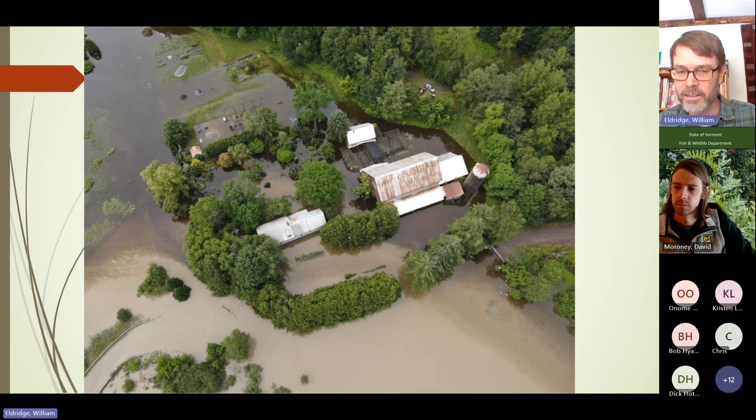So jumping into it, July 2023 made Vermonters aware of the risks that we face with climate change and particularly flooding. It was devastating throughout the state. It kind of opened our eyes to the reality that we're facing. We just had Tropical Storm Irene in 2011, and then this event in 2023. These huge events are occurring more frequently than we expected. These things could occur again in the future. And so how do we learn to live with flooding, recognizing that this is probably the future that we face?

And a couple of things. So historically, we've tried to address flooding by really just trying to get water off the landscape, out of our systems as quickly as possible, just get it downstream and try and control flooding where we can. And what we found is that really is not practical or sustainable or effective. And it can actually make problems worse. And I'll introduce some of those problems.

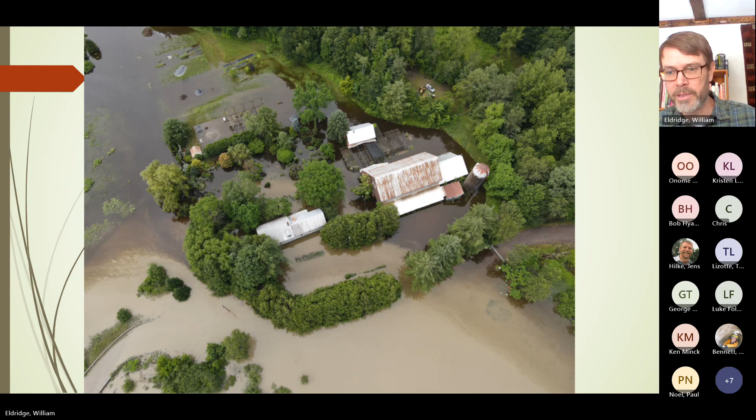But when we talk about flooding, there's really three different areas, specific impacts that flooding can have. And so this image, this is a farm that was flooded during the July floods. And so this is showing what's called inundation. So this is where that water spills out onto the floodplain and basically floods structures and dwellings and kind of leaves them uninhabitable.

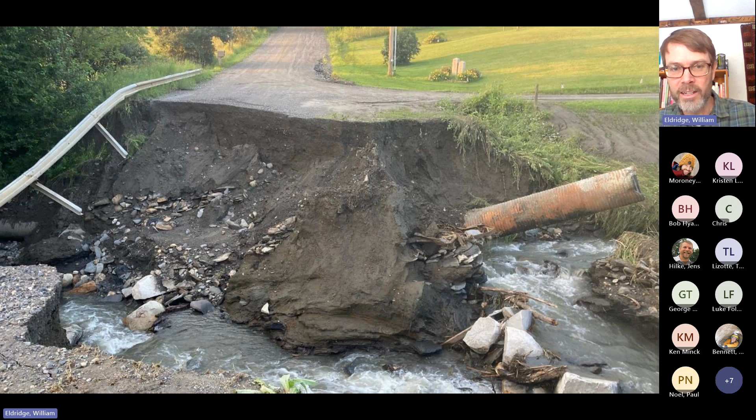And here's just another example of what can happen. Here's a road where the culvert just got washed out during last year's floods. Historically, and to some extent even today, how we respond to floods is we're just patching things back together. We're recognizing that this is an emergency situation. We need to get roads open. So we're just, in this case, slapping the old culvert back in, paving it over, and just making sure that people can get through.

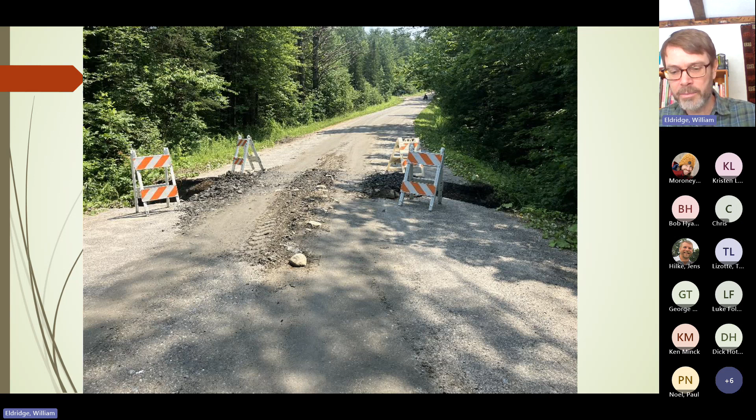Going forward, hopefully this isn't going to be the practice, but historically this is what we've done. And this is what a lot of other states continue to do: they really just put the same infrastructure back and hope for the best, basically. The other thing we've seen a lot of is people are concerned about this material getting mobilized, so they'll actually get in the stream or river with heavy machinery and dredge it out, and then build up the banks and basically create a pipe, a channel, just to keep that water in there and make it move as quickly as possible.

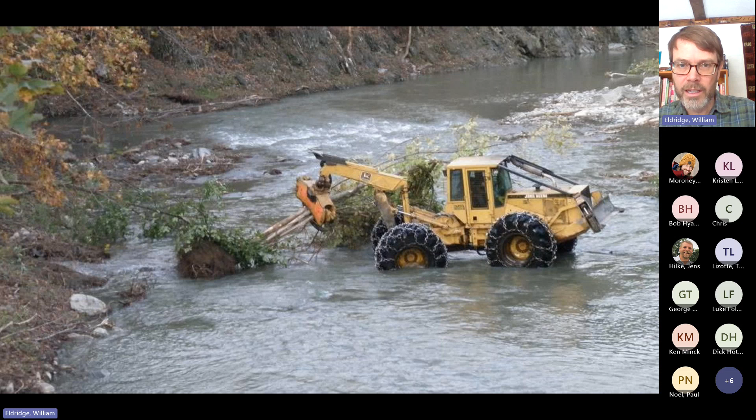Here's another example of removing trees from the river. These are pictures from after Tropical Storm Irene, where people were going in and removing material from the river. What ends up happening is you end up with situations like this where, from a fish perspective, this is not good habitat. This is a type of area where we wouldn't find fish. Also, because the banks have been built up, it's holding more water in the channel.

One of the questions I often get is, how are these floods impacting fish? There are two different outcomes that can happen. In situations where we've left the habitat intact, we will see a small decline in the fish numbers, but within 1 to 3 years they'll actually recover. And often we see increased growth in the fish. You get a lot of terrestrial subsidies, as we call it, a lot of food, bugs and stuff falling into the river. Those fish that survive are doing really well and grow really quickly. So when habitat's left intact, these populations recover pretty quickly.

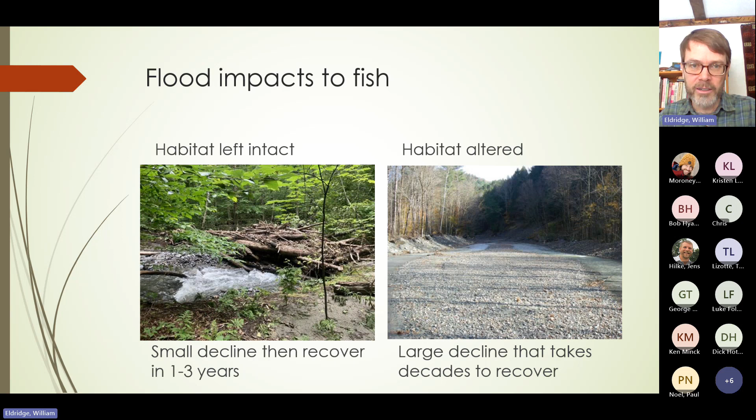In these altered habitats, where we've channelized the system, removed all the material, removed the habitat, we don't see those populations recover. We see the populations crash, and even after Irene, we haven't seen those populations recover, to the point that we've had to go back into some of these systems and try to restore that habitat. We actually just did a project, ironically, in August of last year. It was a post-Irene habitat recovery project that we did in 2023 while dealing with that flooding. So again, point being, we're still recovering from some of these habitat modifications that happened a decade ago.

The other issue is that this flood response can also be detrimental to people. We've straightened our rivers, we've removed the material, and we've basically created this perception that we've reduced the flood risk. So we've built in these flood-prone areas. This is actually my neighborhood in Montpelier, where we've straightened the channel and put houses back in what would have been the floodplain or river corridor, where the channel would have migrated historically.

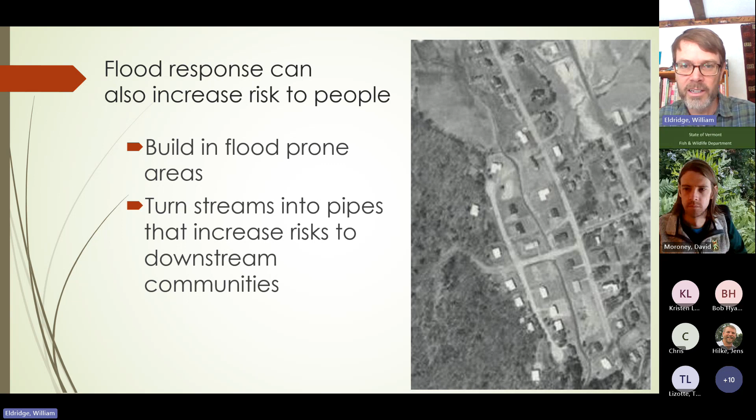The other issue is that we've turned these streams into pipes. By moving that water downstream, we're increasing the amount of water ending up in those downstream communities, making the flood risk greater down there, increasing the erosion and inundation risks. So what I'm here to talk about today is the alternative strategy that we're trying to encourage Vermonters to take to deal with these flood risks, and also why this approach is good for aquatic organisms, fish and other wildlife. With that, we'll take our first break, and if there are any questions, I'll be happy to answer them.

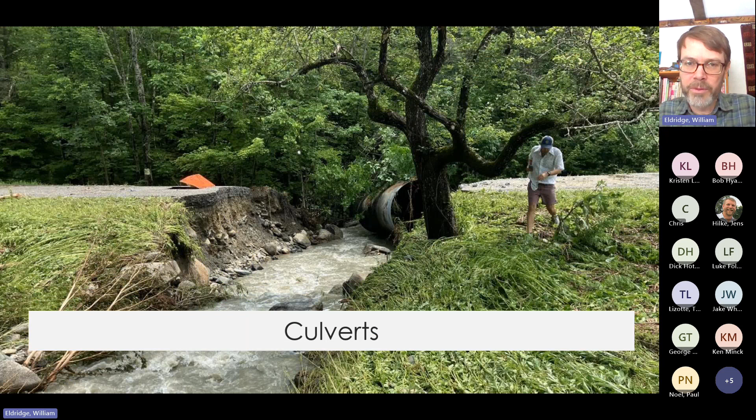The idea being that we're going to reduce the amount of water hitting our developed areas. Starting with culverts, I want to talk about things we're doing to increase flood resiliency as well as aquatic habitat with culverts. This is an example of a culvert that failed during the July 2023 flood.

Here's another problem that culverts can have. Even if they don't fail, they can become barriers to fish passage. This culvert is perched. There's about a 2-foot drop between the culvert and the stream below, so fish are basically not able to move upstream through it.

What's interesting is these culverts often are not installed with a perch; this evolves over time. Because the culverts are undersized, they're not able to pass material like rocks and wood. That material builds up on the upstream side, and you end up with erosion or degradation on the downstream side, so this perch evolves over time.

What we're recommending is first to size these structures to what's called the bank full width. Bank full width is a hydraulic concept, but basically it's what we take to be the width of the stream when it begins to spill out onto the floodplain. That's roughly the 1 to 2 year event, or 1.5 year event.

What we find is that culverts sized to the bank full width are more flood resilient. They're able to pass material as well as maintain aquatic organism passage. There are some other things included in this, like embedding them so they have natural stream bottoms throughout. That also helps with passing fish and other organisms.

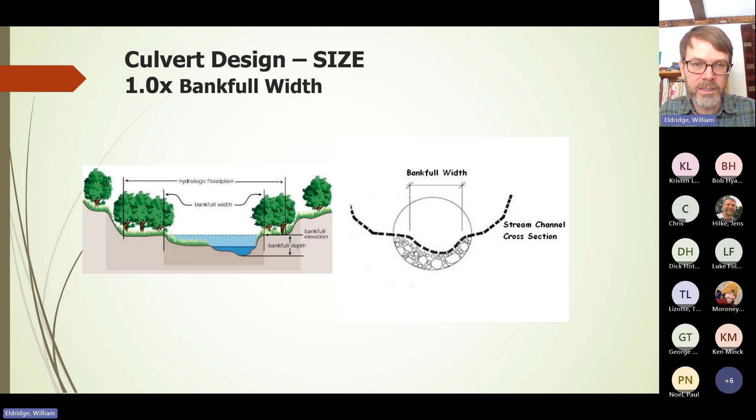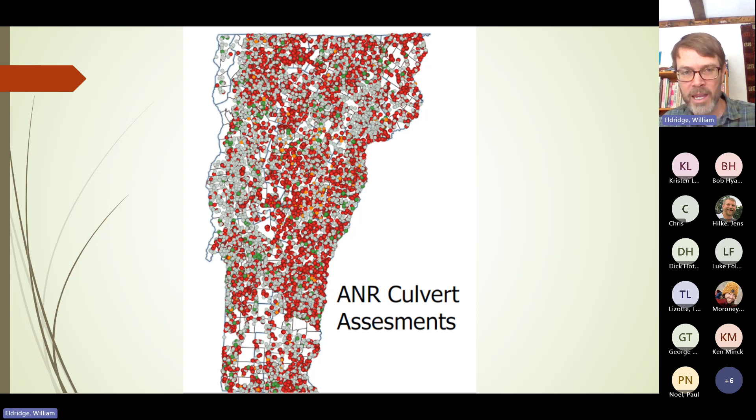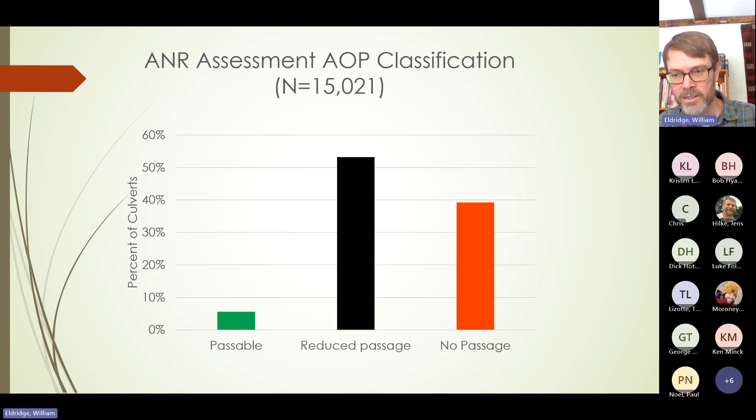Red are structures that are impassable, gray are partially passable, green are fully passable, and it's pretty obvious from this picture that most of our structures are impassable or partially passable. Looking at that in chart form, you can see that only about 6% of our structures are fully passable. Most are reduced passage or offer no aquatic organism passage.

Also, when we look at the size of our structures, this is that bank full width ratio, the width of the structure relative to the width of the stream. We see that over 50% of our structures are less than 50% of bank full width. And so bank full width, that ratio is one of the key risk factors for failing during a flood. So most of our culverts are at risk of failing during a flood.

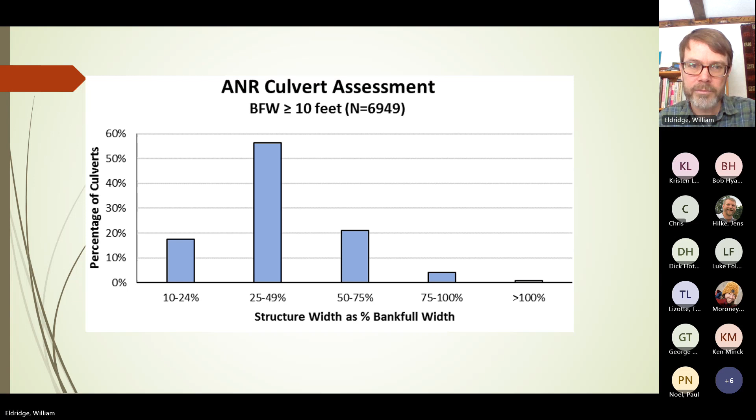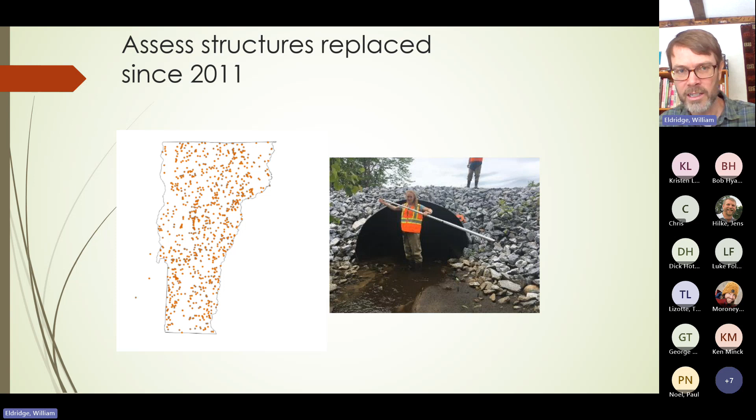Now, that being said, after Irene, and actually a little bit before Irene, Vermont adopted standards for bridges and culverts that required them to be sized to the bank full width standard, as well as aquatic organism passage. And so what I did in the fish division here is we actually went back to some of these structures that have been installed since 2011 and looked at how well we've been achieving these standards. Have we been installing structures that meet that bank full width standard and the aquatic organism passage standard? And we looked at about 200 structures across the state, 215.

And just from a fish passage standpoint, what we found is that before there was only about 6% that were fully passable. Now it's up to about 40% are fully passable. So a huge improvement in that passage standard. There's still a few that fall into the reduced passage and much lower that hit the no passage standard or don't provide aquatic organism passage.

And there's a variety of reasons that happens. Often it's due to challenges at the site. Either there's ledge or something like that may make it difficult to embed a structure. But anyway, that's a subject for another day. But basically, the point I just want to make is that we're definitely moving in the right direction from an aquatic organism passage standpoint. And then here are just some examples of what those structures look like.

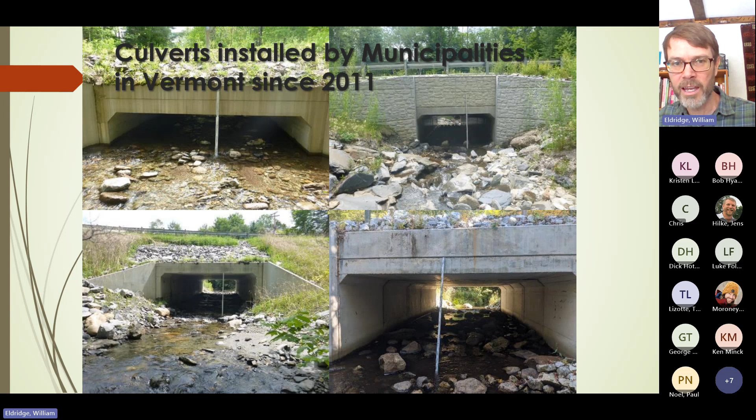So these are all concrete box structures installed by municipalities. And I want to emphasize that these are structures that municipalities, using their own funding, designed and installed up to our standards. And so these are not structures that the state Fish and Wildlife Department is installing. These are ones that municipalities are doing on their own. And so all these structures are examples that meet our standards for size as well as for aquatic organism passage.

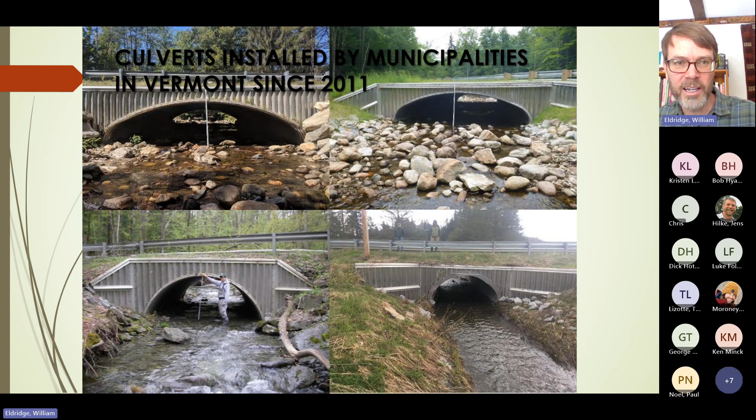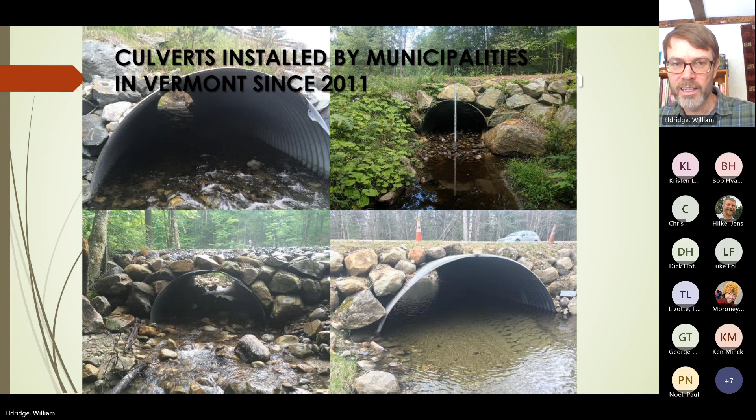All right, and so here's some examples of aluminum arches or squash culverts, and then round pipes. And so again, all of these are examples of where municipalities have installed structures that we feel meet the standards. So this is happening in Vermont, and it's definitely an improvement. The other important question is, all right, so it's working for aquatic organism passage. How's it doing for flooding?

And so after the July 2023 flood, we went out and we assessed about 60 structures around the Montpelier area, which got hit pretty hard. And what we found is that structures that were installed to standards, so structures that were installed since 2011, all of them were intact. We didn't see any signs of material accumulating or the road being washed out.

Now, here's an example where we had an interesting juxtaposition. So we had a replaced culvert upstream and then just downstream, this is in Orange, right off of 302, we had an undersized culvert, one of the old culverts, that completely blew out. And so this is, to me, one of those quintessential examples of how sizing our culverts to standards provided that flood resiliency.

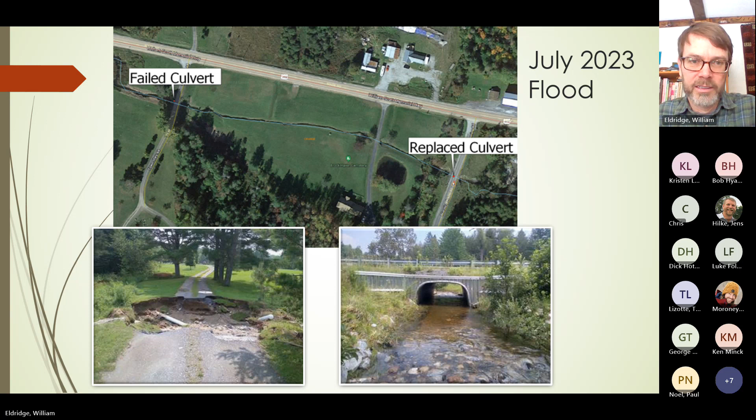And so what can municipalities do to address these aquatic organism passage, these culvert issues? And so the first would just be following our stream alteration standards for culvert and bridge repair and replacement. The other is just work with the Department of Environmental Conservation stream alteration engineer, and so they can help municipalities with design and permitting related to streams, culverts, and bridges.

And then the third is these rivers and roads trainings and highways and habitats trainings. These are two trainings offered by the Agency of Natural Resources in conjunction with the Agency of Transportation. And I'll talk more about that in a second. And then there's also more information on the Fish and Wildlife Department website about culvert design for aquatic organism passage.

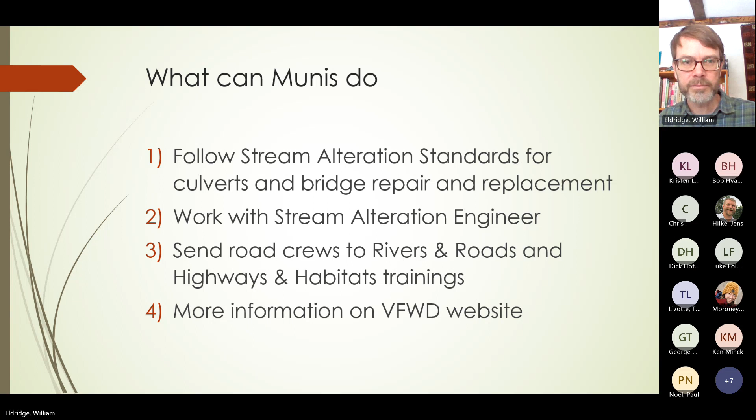And so those trainings, the rivers and roads and highways and habitats, these are multi-day trainings that are really immersive. And so the idea is that we're working with municipalities, road foremen, Agency of Transportation engineers, project managers, and basically introducing them to the concepts of our stream alteration standards and what's called road ecology. And so that's that kind of wildlife road infrastructure interface.

And so these are a combination of classroom presentations as well as some lab exercises. We have what's called a stream table where we can actually simulate a flood and look at how different road infrastructure is impacted.

And then we also have some field exercises where we actually go out to different sites and get to see different practices and discuss them. And let's see, the next Rivers and Roads training will be in May. For Highways and Habitats, there's a Tier 3 happening this spring, and then there's another 4-day Tier 2 training happening in the fall. And that's something I'll be happy to answer questions about if there are any.

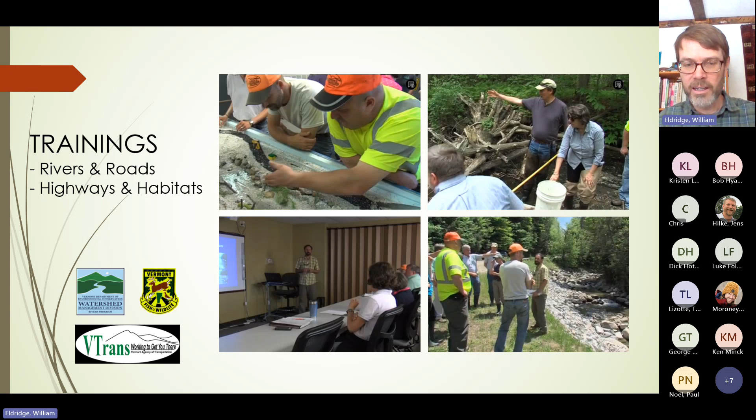And I think with that, yes, we'll break for questions. All right. Well, we've got comments and questions.

Okay. So the first one, I've got a question following up on a comment. Ron in the comments pointed out a particular culvert across State Route Vermont 100 in Hancock, Vermont that likely needs replacement for trout migration. So my follow-up question is, can people report instances of culverts that seem like they really need to be replaced or might be a high risk for washing out, for flooding, or for interrupting habitat?

Yeah, that's a really good point. Definitely. We do work with partners. We don't have the capacity ourselves in the department to do this, but we work with conservation districts, watershed groups, and others to identify priority structures for aquatic organisms or wildlife connectivity and to try and replace them, either up to standards or with a wildlife shelf, something to provide passage.

That being said, these are complicated, expensive projects, and they don't happen right away. We don't have capacity to do a lot of them, but yes, we're definitely interested in identifying those, and as our capacity exists, we will address them.

Great. Okay, so a question from Ken at the Georgia CC. In Georgia, they have a hydraulic study for an AOP stream. The question is, do they need any additional engineering beyond an existing hydraulic study? Yeah, that's definitely a question for the stream alteration engineer. Chris Brunelle, I think, would be the engineer up in Georgia. I'll just leave it at that. I'm not the expert to answer that question. Okay, fair enough. Thank you.

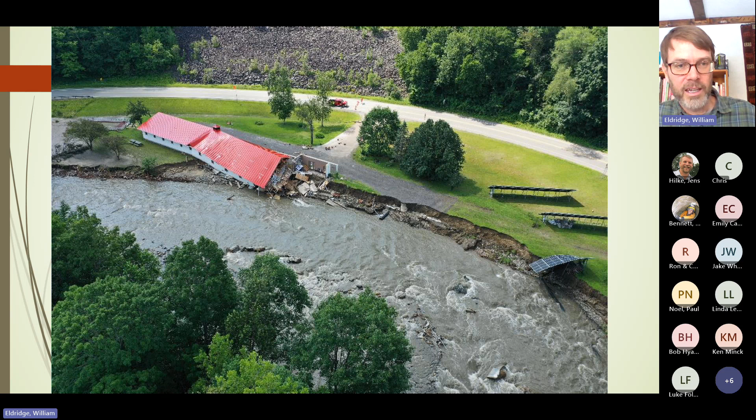There are some situations where a berm may be appropriate, but in general, this is something that would require working with our river engineers, the stream alteration engineers, to figure out when and where it's appropriate. Because of the risks it poses, basically, if there's no infrastructure at risk, then we'd prefer to allow those floodwaters to access that floodplain because it will reduce the flooding downstream.

All right. And so, here's the DEC, the Department of Environmental Conservation, their vision of the whole river management, what we've done. So historically, these rivers had lots of meanders. They went back and forth. And so we consider these rivers naturally stable. But like I said, over time, we've removed the material, we've channelized them, we've straightened them.

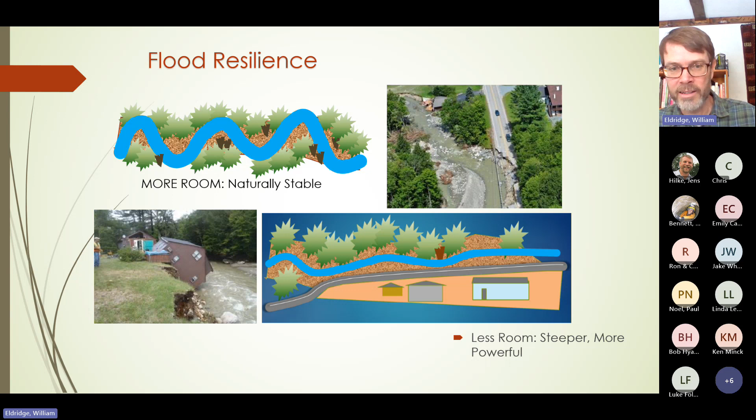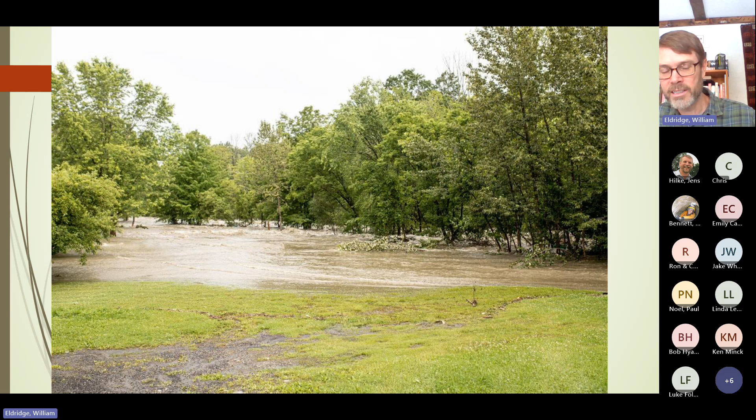We have no infrastructure at risk, and those floodwaters are not really impacting anything here. And this actually is kind of the desired outcome. If we're going to have flooding, we'd like to have it look like this and not like some of those other pictures where houses are being undermined.

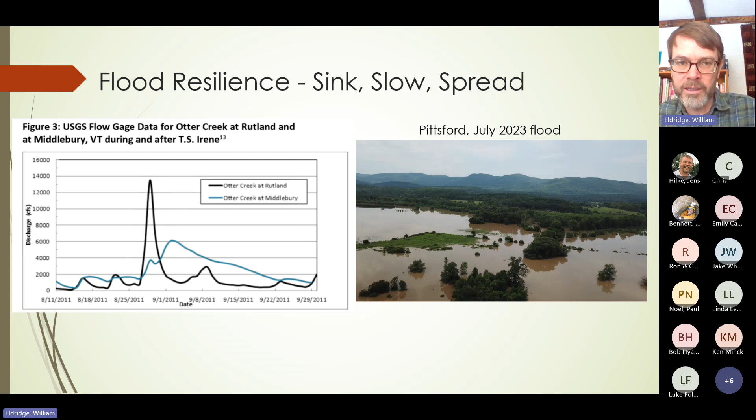And it was able to do this because we didn't really have the infrastructure. There was agriculture there, farms, but there weren't the houses and other infrastructure that was at risk. And so those floodwaters, it was actually encouraged. This is an area that if we can have the flooding, have it happen here and protect those downstream communities. So that is what we saw during 2023 and Irene.

The other thing that we're encouraging folks to do is to restore forested riparian areas. So on these banks that historically have been cleared, either protect the trees if there are trees there to begin with, don't remove them, or if we can, restore them, plant them. We encourage folks to do that. And here's an example of volunteers planting on Forests, Parks and Recreation property on the Little River up in the Moscow or Stowe area.

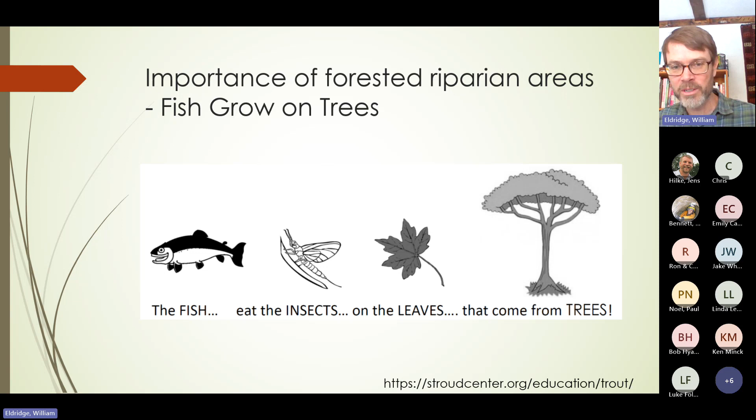And so why do we encourage folks to restore and protect forested riparian areas? Well, obviously, fish grow on trees. That's just something I like to say, and you can make a direct connection. The fish eat the bugs, which eat the leaves, which come from the trees. So you actually can make a food web connection between fish and trees. But there's also a lot of other benefits that trees in the riparian zone provide to streams and rivers, flood resiliency, as well as fish.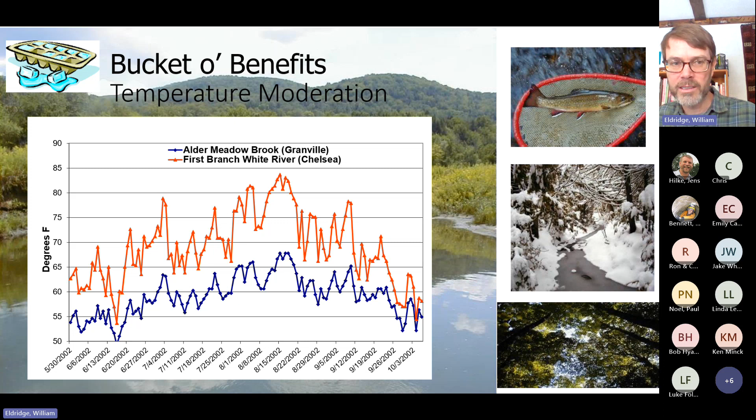And a lot of our fish, particularly brook trout, are temperature sensitive, and so they can't survive in streams that get above 65 or 70 degrees. So they really need that cold water to persist. The other thing is we're seeing temperatures in Vermont increase. This is data from NOAA, the National Weather Service, going back to 1895.

As a result, we're seeing our stream temperatures increase. We've had temperature loggers in our streams since 1999, and we're seeing a similar trend in those temperatures as what we're seeing in the air. So the air is driving a lot of what's happening in our streams, and our streams are becoming less suitable habitat for our cold water species like brook trout.

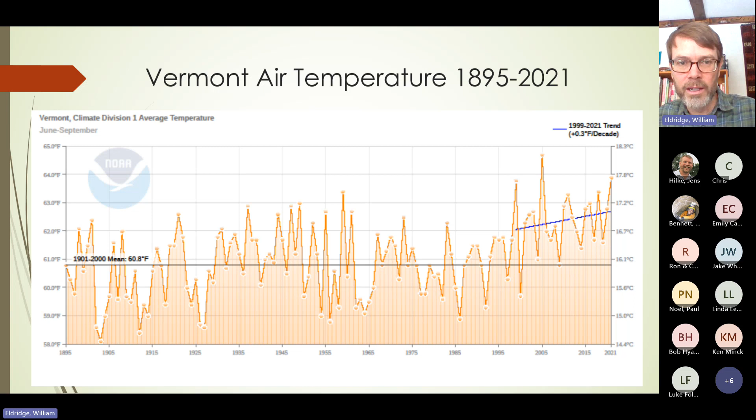And then the other is that organic matter. Like I said, there's the leaves, there's bugs that eat leaves. There's also insects like ants that fall off the trees. And so a lot of our streams are actually fed by the terrestrial environment. It's that organic matter input.

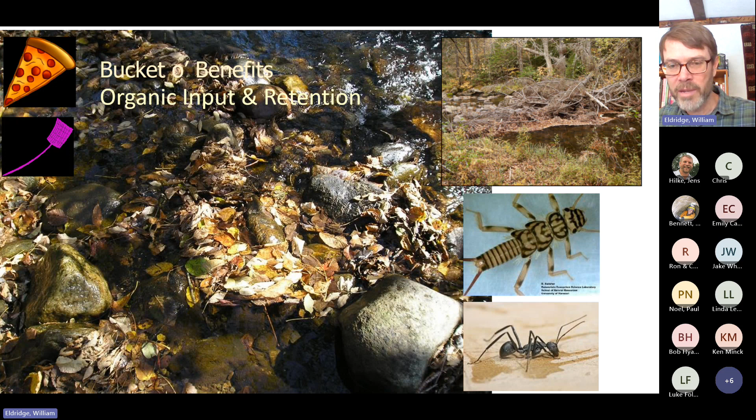They're also habitat for a lot of birds, amphibians, reptiles, and mammals that live in those riparian zones. Eagles are pretty cool. Herons. We'll see bats up there. For people who like snakes, there's the northern water snake that lives in there. We've talked about beavers and muskrats, and then wood turtles, another pretty cool species that really needs these forested riparian areas.

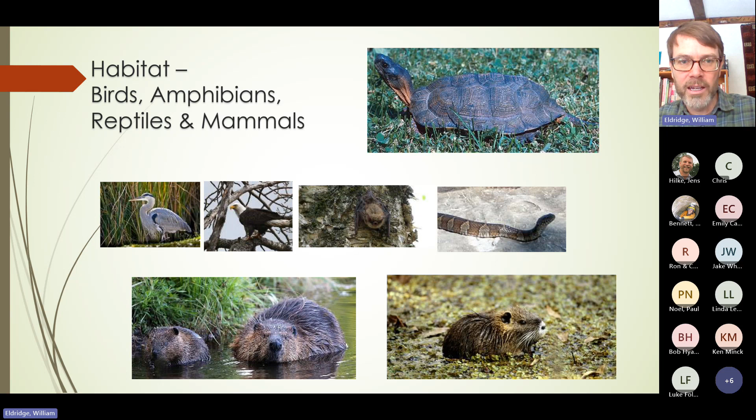And then there's travel corridors. So animals may not live entirely in the riparian zone, but they'll use the riparian zone to get from one place to another. And so moose, bear, and deer are examples of animals that will use these riparian zones as travel corridors, particularly forested ones. They won't really use them if they're open.

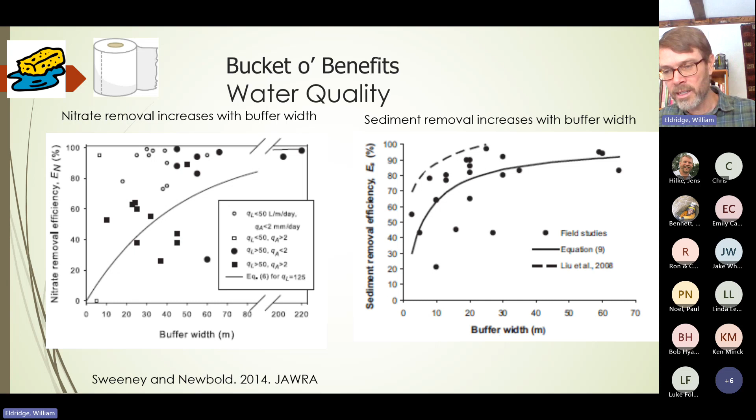And then water quality is another benefit. There's a pretty comprehensive review back in 2014 that looked at the buffer width, so how wide the forested buffer was, and the water quality benefits. What this study found is that for both nitrogen and sediment, as the buffer increased in width, the benefits increased. And this study concluded that about 30 meters or 100 feet was the optimum width to achieve multiple benefits for the stream. The study looked at temperature, water quality, and a variety of other things.

So in terms of recommendations, what's the recommended width of our riparian management zone? What we recommend, largely based on that 2014 study, is 100 feet on each side of the stream or river. And the other important thing to point out is that it's actually almost more important on small streams to have this 100-foot riparian management zone, because those small streams are much more connected to the terrestrial environment. What happens on the landscape has a much greater impact on the aquatic system.

And the other thing is, these small streams can be up to 70% of the overall stream network. So really what we do to these smaller headwater streams has an overwhelming impact on the overall health of the aquatic system. I've been focusing mostly on aquatic habitat and water quality. Similar things could be said for flood resiliency. A lot of that water that's ending up downstream is starting out in those headwater streams.

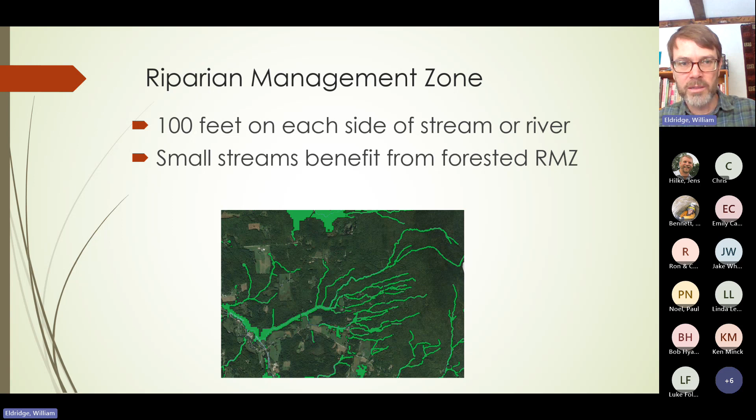All right, so what can municipalities do? The first is to adopt floodplain standards. This is something you can work with the Department of Environmental Conservation on. They have a rivers program and river scientists who can help with that. Adopt riparian protection standards. There's a few municipalities that have adopted those. I think that's something Jens might be able to help with. And then again, the rivers and roads and highways and habitats trainings. In both of these trainings, we discuss the riparian zone. And there's more information on the Fish and Wildlife website.

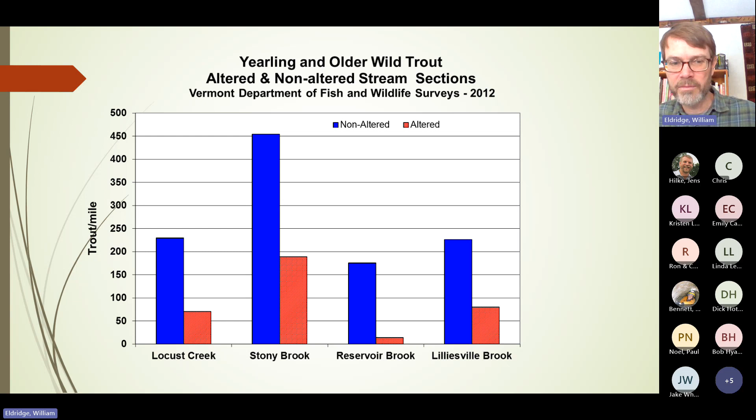trout populations declined precipitously, 50% or more in a lot of these systems where the system was altered. So these are all examples from the White River, after Tropical Storm Irene. And like I said, a lot of these systems still have yet to recover, and we've had to go back in and actually restore the habitat. And we'll see. Hopefully the populations will recover, but it's expensive. It's not guaranteed to work. Much better to leave material in place if you can.

Another big, kind of counterintuitive risk: landslides. You actually increase the risk of landslides when you dredge a river. All right. And I want to take a minute to explain this. So when you remove that material, basically what you're doing is you're lowering the bed of the stream. And when you lower the bed of the stream, you make the banks less stable. And when you make the banks less stable, they're more likely to fail. And so even though that may be happening downstream, what ends up happening is what's called a head cut. It's kind of like a domino effect.

So you dredge one part of the stream, and that dredging ends up migrating upstream. So it ends up filling in all that material. And when that fills in, it lowers the bed upstream. And so what we find is that streams that are dredged routinely, you end up with these unstable banks, and you can actually increase erosion and landslides and make problems worse, right? So now you've got even more material coming into the stream because of the dredging that has occurred historically.

But after this July flood, Fish and Wildlife Department, we went out and we surveyed streams and rivers. And what we found is that areas where there were wood jams, where material was left in place, the streams were unaltered, that's where we found the fish. And so this is a section I did, and all the fish I pulled out of this stream were right under this log jam. That log jam didn't move during the storm. It provided refuge from those high flows, and the fish were able to ride it out, basically. And so these log jams are important areas for fish to avoid those impacts of floods.

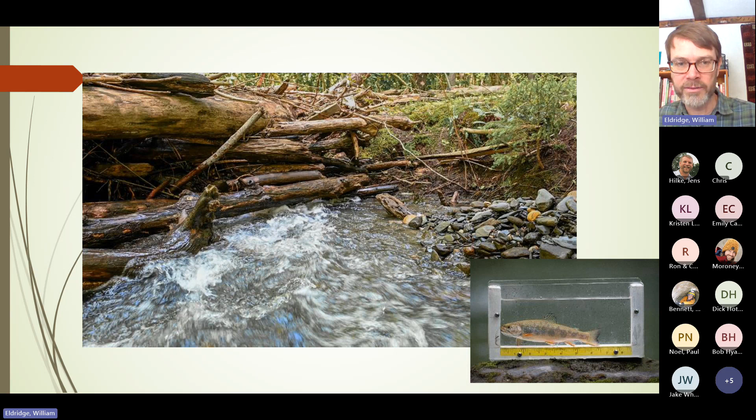It's also depositing a lot of sediment. And so folks in the Champlain Basin may be aware of the connection between sediment and phosphorus. The phosphorus is actually physically connected to the sediment. And so if you have that sediment depositing on the bank, it's staying there and it's not ending up in the streams and rivers, not ending up in Lake Champlain. So this is actually a water quality benefit as well as a flood resiliency and habitat benefit. And then, like I said, we like to say fish grow on trees.

And so in Vermont, the Fish and Wildlife Department, we've actually adopted a practice of putting log jams back into streams and rivers. And so we've developed what's called the Strategic Wood Addition Handbook, and this is a guideline for how to do wood addition in a way that will benefit the resource, the aquatic organisms, and water quality and flood resiliency, but also reduce risks, because we are aware that when wood mobilizes, especially when there's undersized structures, culverts and things, it can be a problem. So we have a handbook on how to do this in a way that provides benefits,

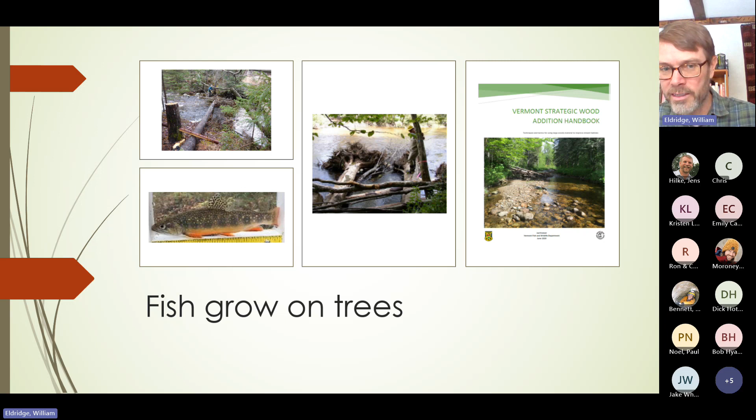And the concern is the undersized infrastructure. So what happens when you have wood in these streams with smaller culverts? And like I said before, what we found is that structures that were sized to standards did not have the wood accumulating. And so when we install our structures to bank full width standard, that reduces the risks.

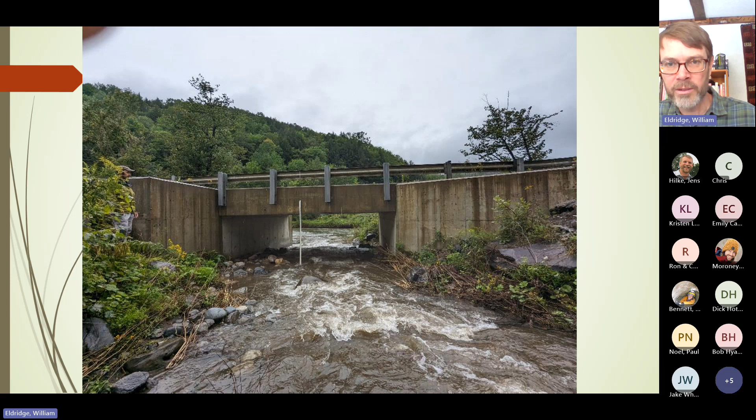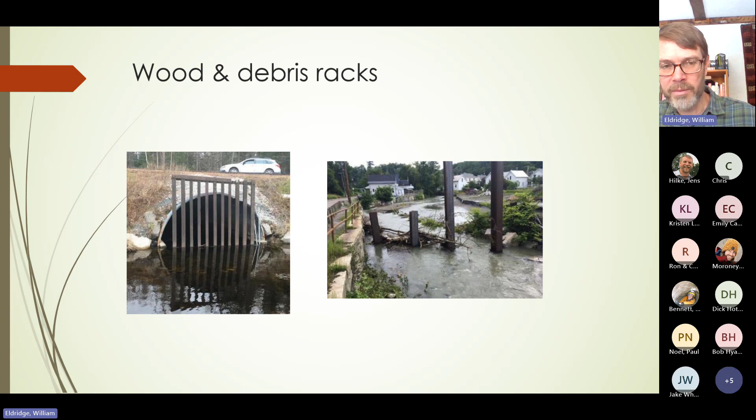I'm not saying that we should go in and put wood everywhere, but we still need to be cognizant of that risk. But it seems, at least, that the risk is lower when we have these 1.2 times bank full width culverts. And then there are some situations where that's not possible, and we have seen additional strategies, such as these wood racks, to try and accumulate material and keep it from getting into the culvert, blocking up the culvert.

All right, and so what can municipalities do? Follow stream alteration standards for wood removal. So basically, if you don't need to remove it, if there's no threat to human health and safety, we encourage folks to leave the trees in the stream and river. And again, work with the stream alteration engineer, the DEC program. We work with them a lot to develop these standards and make recommendations for municipalities.

All right. And so just want to wrap up. So in conclusion, the first point is, we recognize that flooding is going to happen. We're a mountainous state. It's getting more humid. We're seeing more water, more precipitation. We anticipate that we're going to continue to see floods, and that those floods could get worse. What we're recommending is, if we can learn to live with flooding rather than trying to prevent it or mitigate it, it'll be better for both people and fish.

We can increase flood resiliency and aquatic habitat by restoring these natural processes. And so today we learned about 3 areas that municipalities can do to increase flood resilience and aquatic habitat: fish-friendly culverts, forested riparian areas, and in-stream log jams where it is safe to do so.